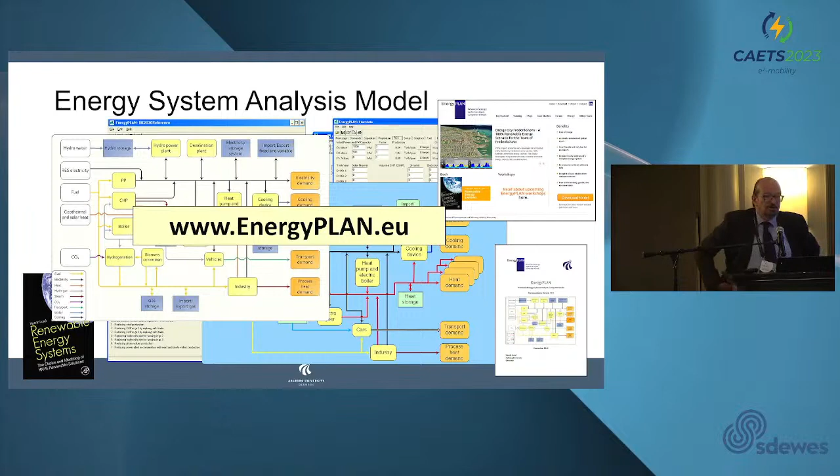In order to do that, you need to have a good energy system analysis model, which Henrik has developed 25 years ago. EnergyPLAN is, for example, a good one to understand what goes where. All these fancy optimizing energy planning systems are hiding technologies that will actually be of huge help. Especially if you calculate only power system, you will not see the future, you will only see the problems. So you need to do a holistic approach.

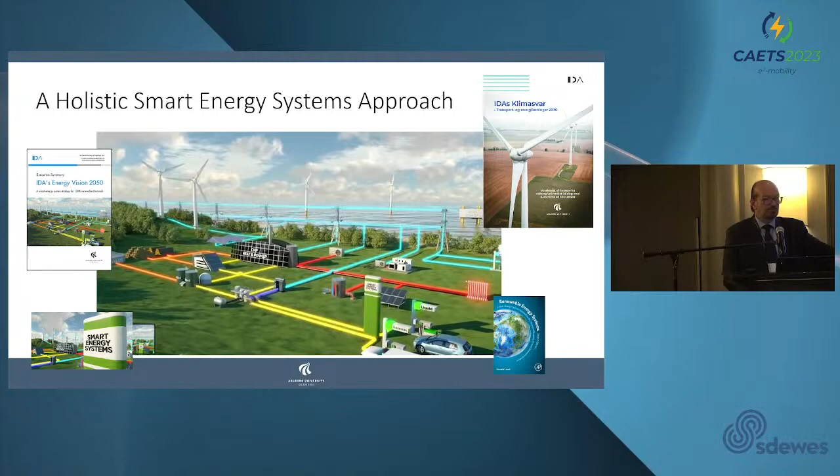You have to model everything all the time in very fine hourly time steps. So power, heating, cooling, transport, biogas, feedstocks for industry altogether. And for that you need to have very developed energy system analysis model that can model all these subsystems.

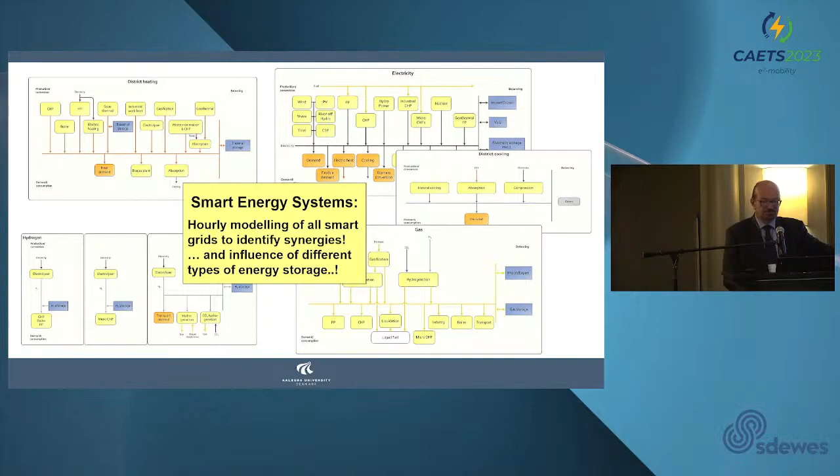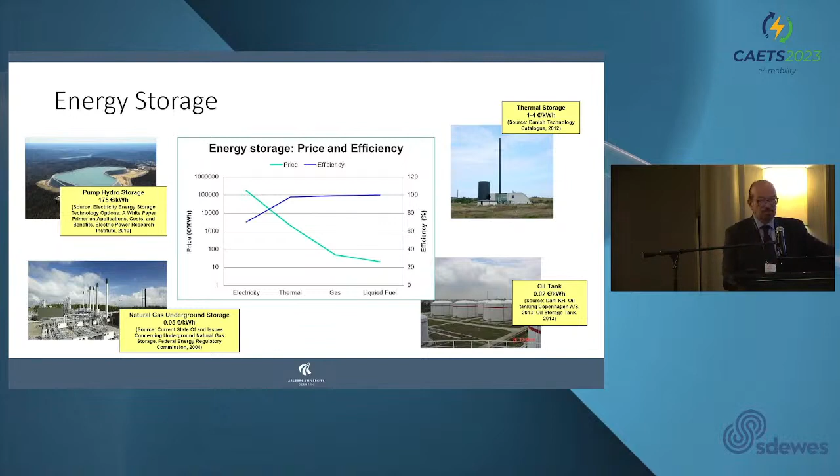An important outcome of this modeling is that storage is going to be important, but electricity storage is very expensive. And we are going to have very little electricity storage. That's why we need to integrate different sectors, because if we store heat as heat and not as electricity, it is much cheaper. If we store gas and not as electricity, it's even cheaper. So we should actually store final fuel that we are going to use. We could sometimes use these fuels back as a backup, but that will not be necessary that much.

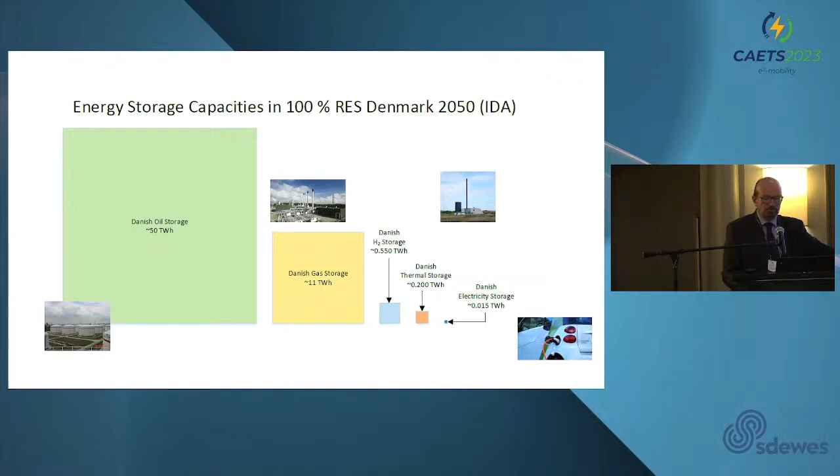So if we look at historic storages, the biggest one in Denmark is oil storage, a huge amount, and then gas storage, and thermal storage is very small. And then if we look at electricity storage, it is extremely small. And most probably we are going to stay with relatively small electricity storage. So we have to balance our power system with the other systems, with the heating system and the transport system, in order to be able to integrate wind and solar.

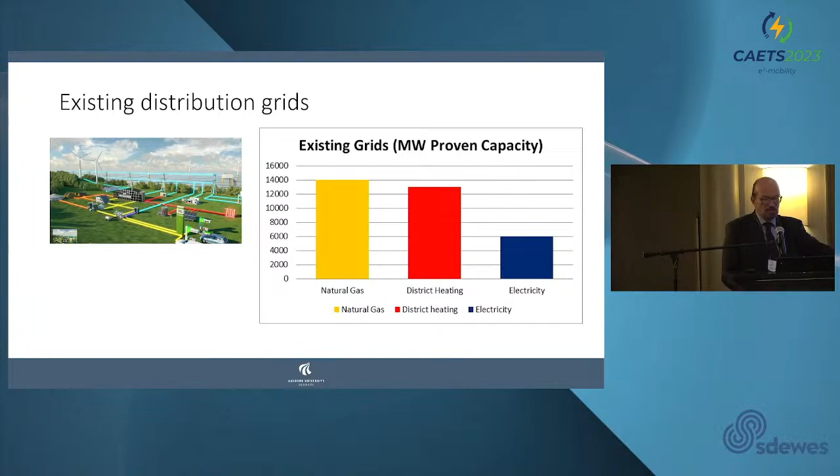And also the grids are much bigger on the gas side and heating side than electricity side. Yes, we can use grid as storage partially, but when we need heat, we should store energy in heat.

Are we going to use hydrogen or electricity in transport? It's quite obvious that electricity is much more efficient. So we will be using quite a lot of electricity because we will have batteries which will be paid from the transport system. That means that storage will not be very costly to the power system. But a crucial thing is we will have to devise such fiscal measures or tariffs in order to make this possible.

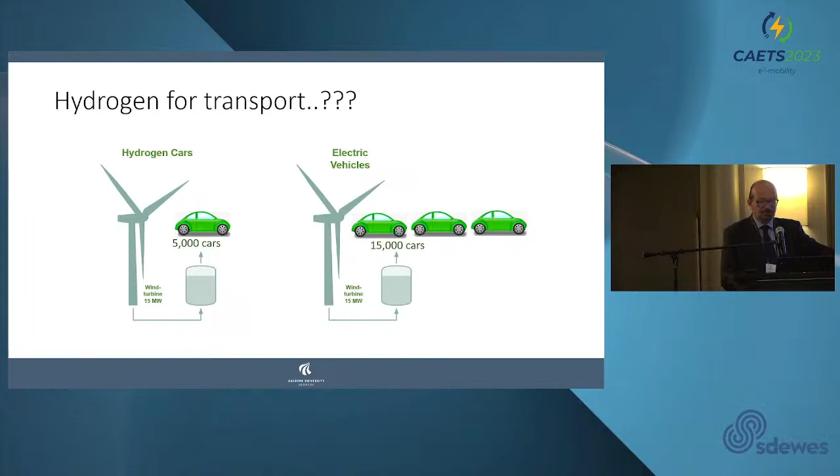And as I said before, coupling the wholesale market with retail price will do the miracles for integration. Hydrogen can serve as a good storage, but it's less efficient, so we should use it only when electricity cannot deliver the service. The energy planning shows that Denmark can reduce emissions by 70% by 2030.

What does it mean in European context? One thing that we should also include is international aviation and shipping, because that's a significant amount of fuels. And we also have to decarbonize those fuels. We will have to produce them from renewable fuels or renewable electricity or from biomass. And we should not use more biomass than is sustainable, in order to avoid breaching sustainability.

Denmark should also make their contribution in terms of flexibility and reserve capacity to integrate wind and solar into the European electricity supply. Denmark is a difficult country to decarbonize because they don't have hydro. Croatia is a very easy place, but we don't have political will. So which way is easier, we'll see. It looks like technical difficulty, if you have political will, is much easier than lack of political will.

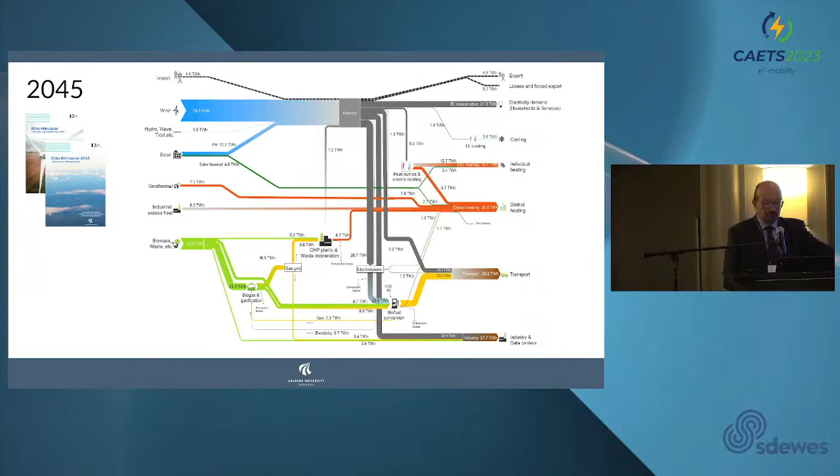And then we have direct use of electricity as much as possible, and some of this electricity will be used to produce hydrogen, and then hydrogen will be used to improve the bio-based sources in order to produce fuels and industrial feedstocks for the production of other things.

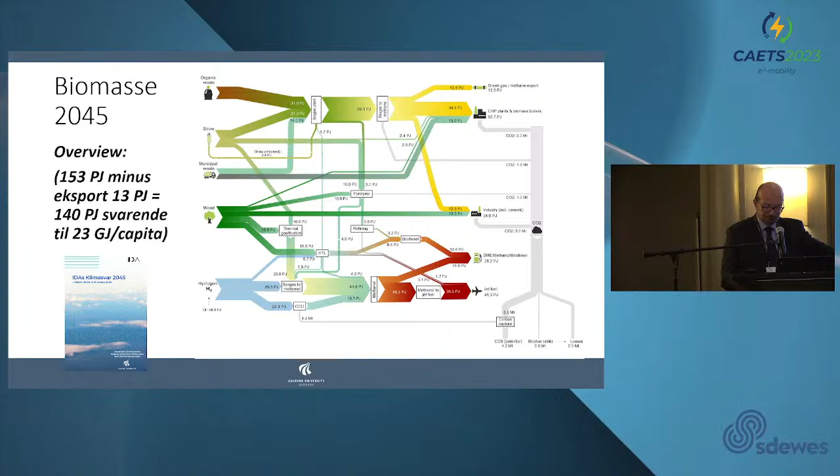And if we look at the biomass, where the biomass will be ending, we can see that quite a lot of this biomass will be also using hydrogen. We will have a bio-e sector, bio-e refineries, in order to produce fuels and feedstocks for industry and for heavy long-distance transport. So that will mean a significant increase of solar and wind for electricity production. Solar will grow 10 times since 2020 and offshore wind 7 times.

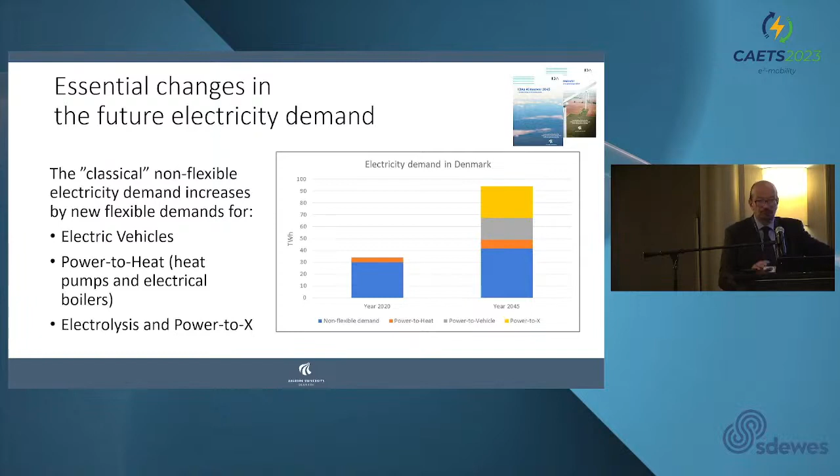That will lead to a significant increase of electricity demand in Denmark, but most of this additional electricity will be used for power to heat, the orange one, which is already used partially, and then power to transport. We see that there is around 40% growth of electricity demand in the transport sector, and then power to X for heavy transport and for industry, for production of hydrogen and hydrogen-based fuels. So more than doubling of primary electricity production.

If we look at an energy system and see what happens when we increase the wind share of electricity in the power system, then we also see the growth of critical excess electricity production, which means electricity that has to be curtailed. It cannot be integrated. Once this reaches around 5% curtailment of total electricity, it stops being viable to continue increasing the share of variable renewables, or wind in this case.

So that means we can integrate easily up to 20% wind. To go above that, we need power to heat. This is what Denmark is already doing. Remember that Denmark already has 50% wind. So they already do quite a lot of power to heat. With power to heat, we can double that integration of wind. With power to transport, we can double it once again, and we basically reach 80% penetration of wind only.

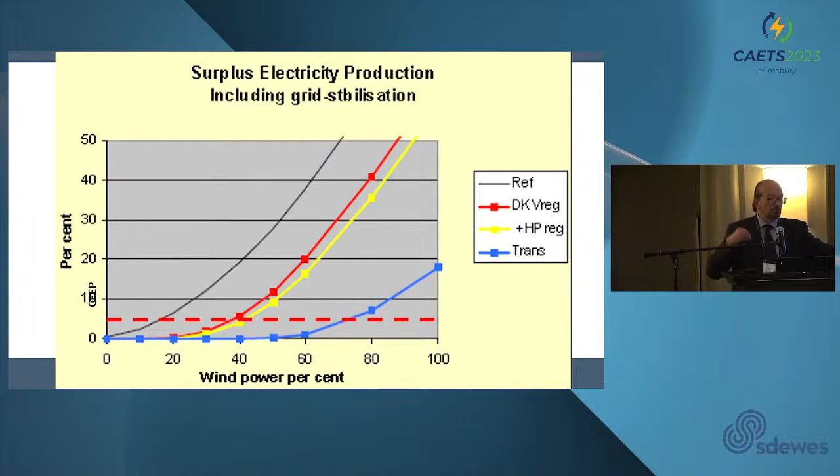So you can then add here some solar and other sources, hydro in Croatia, and you have no problem. The rest will then have to be solved through bio-e-fuels in order to reach 100%. Then people talk a lot about Dunkelflaute, or winter windless weeks. It doesn't really happen. On European level, it didn't happen for the last 5 years.

But if we look on the European level, actually we don't need that much. There's always enough wind somewhere in Europe. The question is, are we going to build enough grid to balance North Sea with Mediterranean wind, or are we building local solutions with demand response? It's generally more secure and cheaper to do more demand response locally and to build the grid only up to a level. Because if we are going to depend on countries which are too far, that is probably not the best solution, but it can be done.

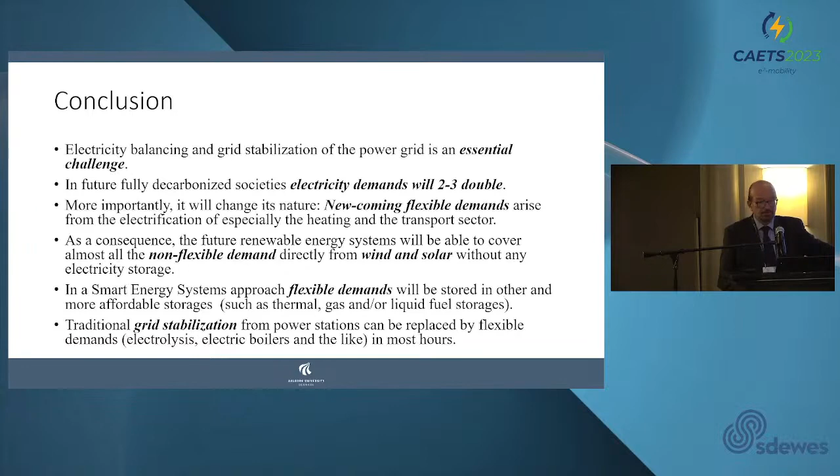With this, I would like to end Henrik's lecture. I hope I did manage to give the main message. He is a great speaker, so it was not as good as if he was here. I will not answer his questions, but we will have a panel to ask the questions.

So I would like to invite now the panelists to step forward. We have Katrin and Jiri and Herwe and Ulrich. Please. Maybe leave this chair to me and take the chairs. Okay. So we will organize it to have first an initial pitch from each of the panelists, and we can start from Katrin. And then we will have discussion, and then open questions. So please. Okay.

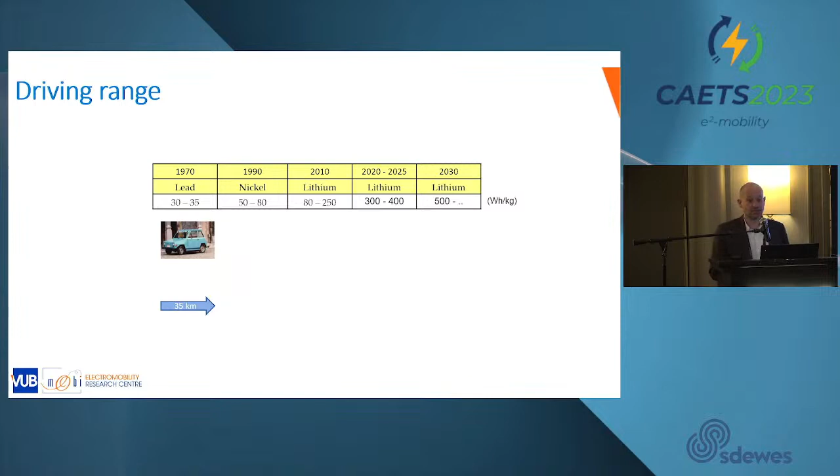Our fleet of the 70s had lead-acid batteries. We could drive around 30-35 kilometers, and then we had to recharge. Our fleet of electric vehicles in the 90s was equipped with nickel-cadmium batteries, and we could drive 70 kilometers. We did a test from Brussels to Monaco at that time. And then luckily the lithium battery was invented, and that was really the breakthrough in driving range of electric vehicles. And lithium, for me, is a family name.

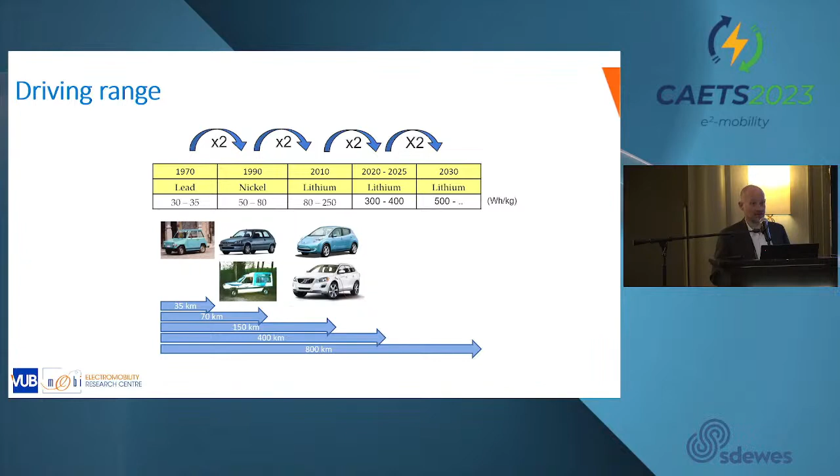There exist many different chemistries in the family of lithium batteries, and this allows us to further improve the amount of energy that can be stored per weight and volume in these batteries. And hopefully we will have battery technologies driving 800 kilometers in the near future. Next to the driving range, the cost of battery technology went down. In the last 10 years by a factor 10, so 10 times cheaper. That's nice. And this cost reduction has mainly translated into the driving range, not yet into the cost of the vehicle.

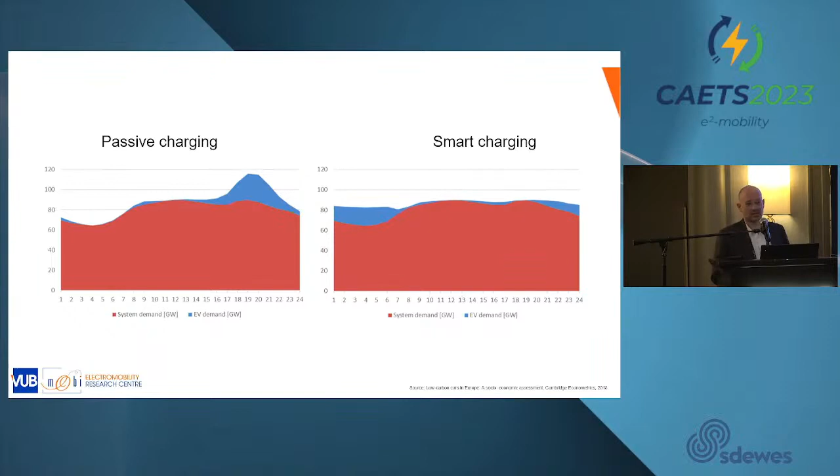But we can go a step further. It is often said that electric vehicles will have an important impact on the electricity distribution grid. Well, my point of view is that electric vehicles are a distribution grid on wheels. When I'm working at my university in Brussels and there are solar panels on the roof, during the day I charge the battery of my electric car. I drive home after work, and in the evening I bring that electricity back to my home. I start cooking, watching television with the electricity in my car.

Do you think the battery will be empty? No, I need only 10% of the available energy in my battery for 1 day of consumption of my home. So I have 90% left to drive around the next day.

So we have to look how to have electric vehicles also there, and that are mainly people that buy second-hand market vehicles. So often we look to the first market, and that's normal, new vehicles and so on. We first need new electric vehicles before they come on the second-hand market. But this is something we have to look in the near future, how to capture electric vehicles in the second-hand market, also how to make them available for a larger population.

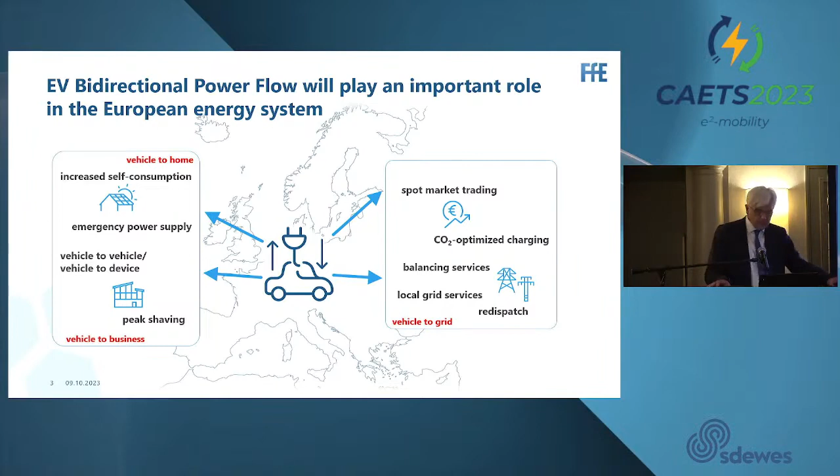Spot market trading, I mentioned the blockchain model, for instance. Then CO2 optimized charging in comparison to tariff optimized charging, local grid service, and so on, many others. So these were the ones identified as the potential most interesting applications. So quite a lot of them. And in another model, other simulation, we calculated the effects of bidirectional power flow on the European energy system in the year 2040.

And just to give you four numbers, so this is for Europe in total, we assume that we can reduce the capacity of stationary thermal power plants by more than 30 gigawatts, or 30 nuclear plants, or big coal power plants. We can reduce the need for stationary energy storage by 60 gigawatt hours. So this is more than the capacity we have in Germany installed today. We can install an extra 300 gigawatt of photovoltaics, because now with this storage effect, we have the capacity of integrating more PV into the system.

And this is a contribution to reduce the energy system costs of the system Europe by 2 to 3%, which at the first sight sounds not so much, but it corresponds to about 7 billion euro per year, which is quite a lot of money we can use for other interesting things. Okay, first impression on bidirectional flow.

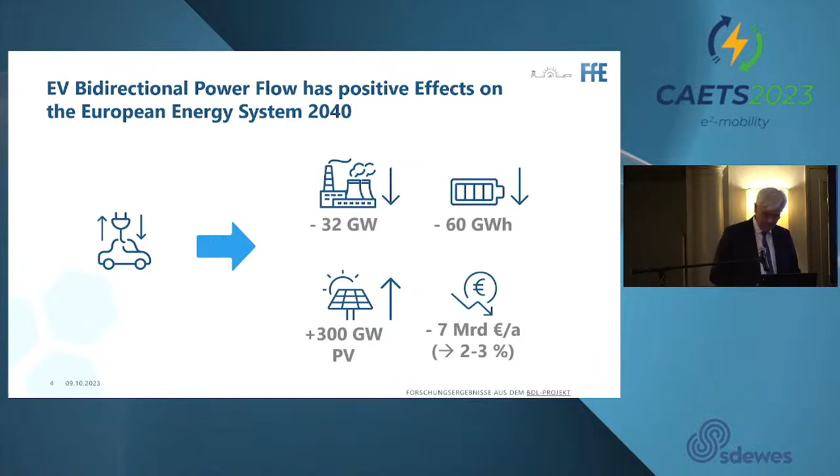More or less, that's a question of smartness of the system. Let's imagine the following situation. Everybody has an electric car. Everybody comes home at the same time. Everybody has a 7 kilowatt charger at home. And everybody plugs in at the same time. That would suck approximately double the installed capacity of a typical country. It's not feasible. It will not happen in reality because we don't come home at the same time. We don't have to charge every day, but we still need to have smart chargers.

What we can see now is that there is a good business model for building fast chargers on highways. There is money in that. Tesla has shown the way, but now others are coming to the market. But what I don't see is smart charging. I see it only in Denmark. Danish people now walk around with their apps, and they can show me how much money they saved on charging their EVs only in the hours when there was a lot of wind. But you can't do it anywhere else.

We have flat tariffs or maybe two tariff systems. But what we need is actually having dynamic tariffs on a 15 minutes basis so our cars can charge when there is a lot of wind and solar in the system. I would like to hear your take, why it doesn't happen, when it's going to happen, and how can we build this business model. Maybe Yuri, Hrvoje, I don't know, who starts? Well, I heard my name first, so, but I fully agree.